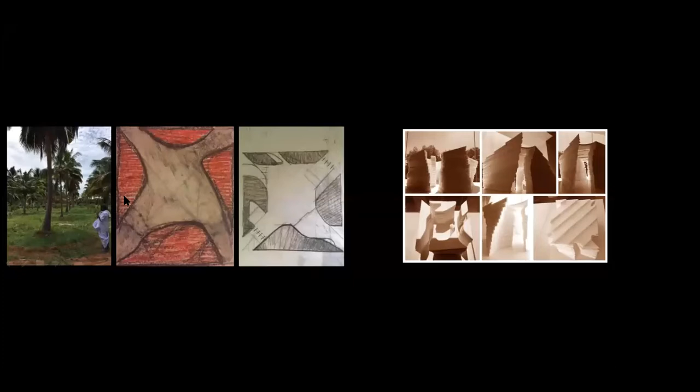So he took us to a land which was in my hometown called Tanjore. He happened to be a central minister in the UPA government for 10 years. He was the Minister of State Finance, but a very simple man coming from a background of a farmer's family, basically. And he was personally involved in farming for many years.

So he was showing us the technique of water divining. I don't know how many of you have seen this. People come with coconuts or with these wooden twigs, and then they take you to certain points where the water current happens. So the minister was explaining with the twig, it starts rolling, it generates an effect which makes the twig rotate. So he says this is probably the right place to build.

And when he was talking about that, he was a central minister, and he was out of power. His party did not come back to power, and in fact he had also lost his local posting for some political reasons. So he said, I can now spend a lot of time, and it's time for me to introspect on what is happening in my life. So you can see somebody who is really tending to look inwards. Having talked to him for so many years, you feel that there is a shift in his thought process also.

And then let's bring in this idea where he could actually be himself within a small space. He said 500 square feet, 50 square meters, small farmhouse. He said, you are free to take it forward from there. So we just took this up, and what you're seeing is the first sketch I was drawing when I was talking to him, when he spoke about these intersections, very intuitively happening. So you are standing at site and trying to think there.

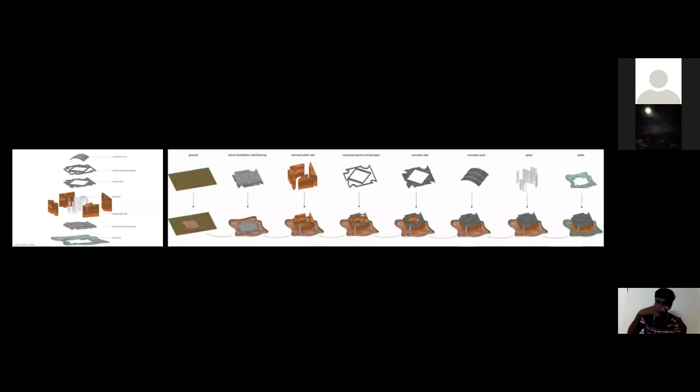You take the brick, and I'm sure you would have seen the way people stack bricks on site, about 1 meter thick or whatever. They just stack bricks and then use them for the construction process. So I was always fascinated looking at these images.

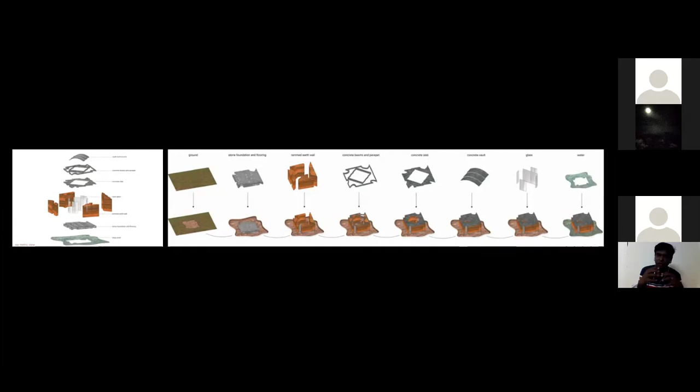So we said, if that is the case, what if we arrange bricks in a very, very organic way, where you create a form, you pour the earth, ram it, remove it, and then you remove the bricks, because they are not bound by mortar. They are just bricks by themselves. So you can remove them and then kind of recreate another form and then keep building like that. So I think that was one of the processes which was kind of exciting us.

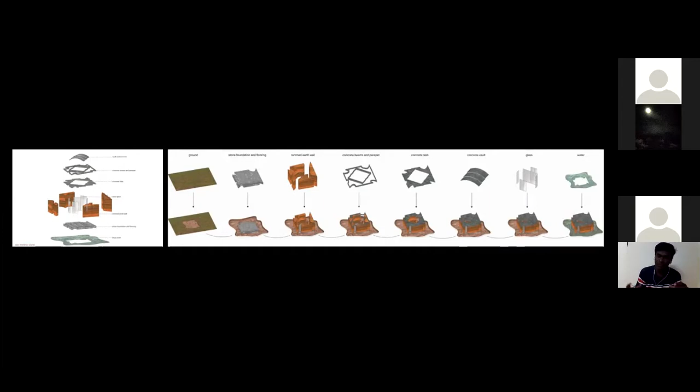So when this idea came, and then we had some old structures from which we said we will take all the stone, because Tanjore is surrounded by hundreds and hundreds of temples. So you will find locally a lot of structures having these stone footings and all that. We said, let's get them and then create like a podium. We dig earth, which is a normal process, which is the education coming from Auroville.

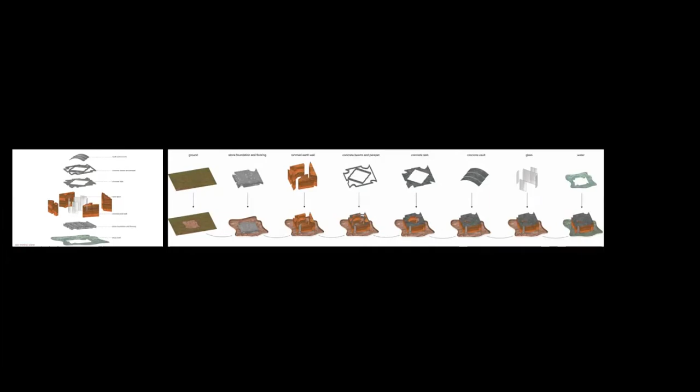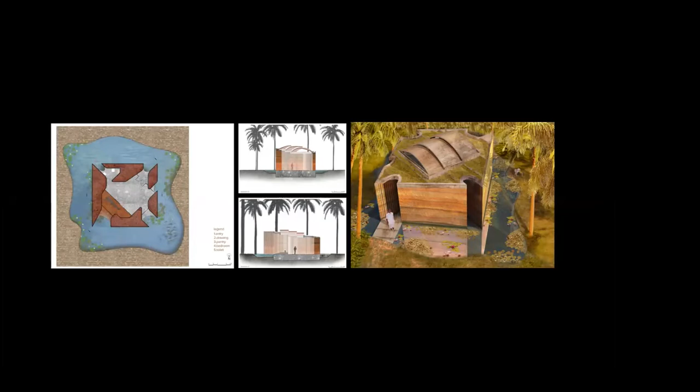See, when we build with earth, we dig a pit, we store water in that pit, and then you build using that earth. So in this case, what we did was you dig the pit, you build right above it. So you have a water body, and then you kind of plot this building within this water body. So that was the entire process. And then I told the client that we will be working only with materials which are available within the site, or within very close proximity. So that's how the entire idea developed.

So this was for an international competition, which was mentored by a very famous Japanese architect by name Kengo Kuma, for a cultural center in Senegal, West Africa. So the whole idea was very similar to the process we were doing for that house. So it's a 5,000 square feet, say 500 square meters, cultural center to be built in West Africa. And it was also calling for how sustainable you can be in that context.

So when we took up this project, we wanted to take a direction where we wanted to be influenced by the local region, and not build exactly the way locals would do. So you only take the inspiration from there. It could be the natural forms which are existing. It could be the built forms which are existing. It could be the culture which is existing. So what we identified was the baobab tree, which is very famous in the African Casamance region, as they call it.

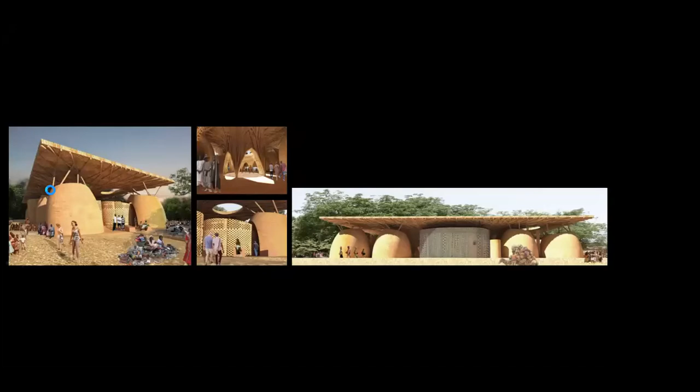So locally available material, if you say, you get bamboo, you get wooden shingles, you get earth which has a mix of shell in it, which they traditionally use for construction. So these are some of the surrounding materials which are available for our use. And then we came out with an expression which is similar to it. It's like a collage of all these 5 or 6 images you see, which then transforms into a built form.

We are also talking about wrestling, which is a very popular sport in the region. So we are creating internal courtyards where the sporting activities can happen within these internal courts. And then, very interestingly, this is also a wetland. So it's a kind of composite climate. I would say it's not purely hot and dry; though it is in Africa, it is not hot and dry.

So we really had to kind of have certain gestures. Like there were a few months when it was really hot. At that time, it was also humid. So we cannot build the way we were building in Rajasthan, where you completely seal surfaces off. So the strategy needs to be, there are certain months for the sake of thermal comfort, you might have to have certain things opening out.

So if you look at these forms, these are shapes which are completely enclosed, and you also have something which is in shade. During the humid months, the in-between places become really, really active climatically. So that's the kind of strategy you are trying to adopt. And in fact, a thick roof built out of wooden shingles and bamboo structure as a second layer completely shades the entire structure, allowing structural cooling to happen.

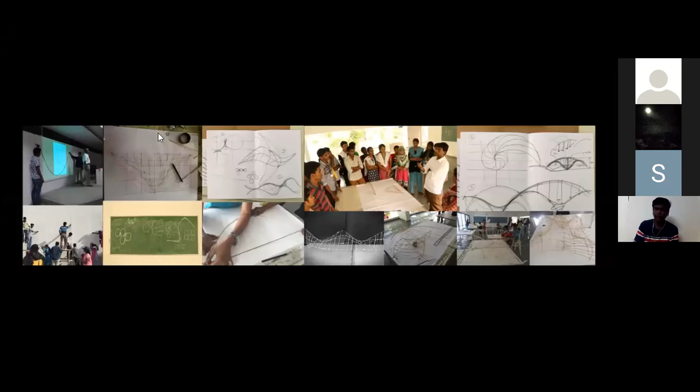So from there, we got some structural engineers, like one structural engineer from Tanjore, which is the next town, who was a very senior engineer and very knowledgeable.

So we got him to explain to the students what a catenary is, and how physically you plot a catenary. And then we even taught them the formulas to draw them. I think, if I remember well, it's y is equal to cosh of x. So if you use this formula, you will be able to plot every intersection in the x and y axis, and then it gives you a catenary.

Today, if you see the technology, in Rhino 6 you can straight away draw a catenary curve without going through all these physical processes. But the physical process is very important for you to understand how things work. Unless you feel the material, unless you feel the process with your hands, it becomes really difficult to relate. So I think it's always good to start working with simple tools in reality, and then probably jump.

So this was happening for close to 2 years. Every semester we would work with different teams. What you see here is something which was closer to what we were searching for. We started rotating the catenary curves on a certain axis, and then we were trying to vary the heights and distances, using just two sets of curves as your determinant.

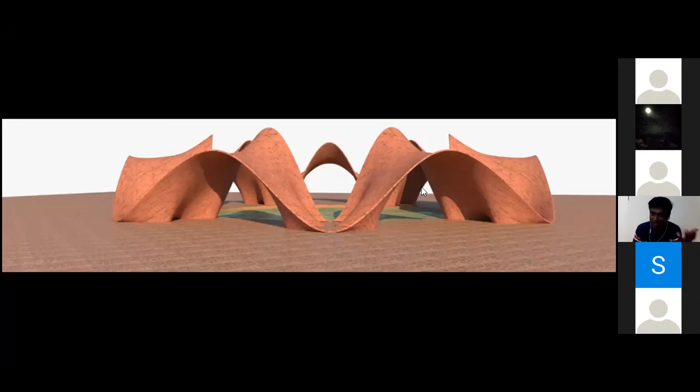And then if you see this, I think this is where finally, after the failure, we came to a point where we felt we need a few points anchoring to the ground in catenary. And then we finally ended up with this, which the structural engineer BL Manjunath said is looking more stable and there are more chances of this not failing.

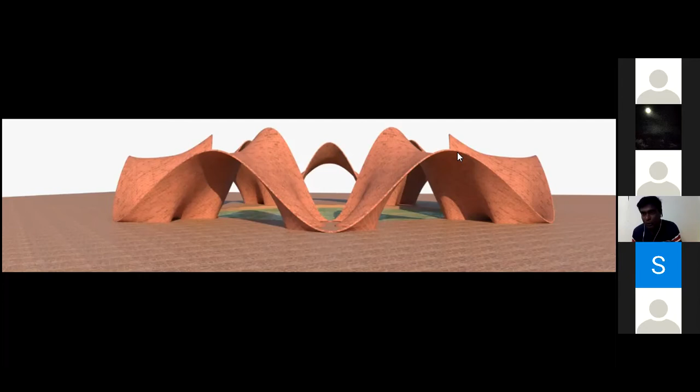So it's not that it will not fail, but what he was saying is your initial exercise was right, your analysis was right. Probably rather than building them as one single loop, you should have built the entire structure in one go, which would have created its own balance and self-supported itself. The mistake we had probably done was detaching the structure, creating a beam, and then trying to rest in it. So I think these are some of the questions which happen.

So slowly from the catenary, you start looking at a little more complex structures. Now it started. I don't know if I've written the right spelling for the Gaussian curves. I think it's GAUSSIAN. Gaussian curves, which if you look at the works of Eladio Dieste, he's somebody who got this concept of varying curves. So I realized that whatever search we have been going through, Antoni Gaudí and Eladio Dieste had work done before that. And then from there we also started looking at the triply periodic minimal surfaces.

Do not get bounced by the terminologies. Most of these exist in nature. When you say minimal surfaces, a soap film, for you to simply understand, is a minimal surface. And triply periodic, because these are all mathematical terms which are coming into the situation. You're talking about positive and negative Gaussian curvature. So, a simple example of these.

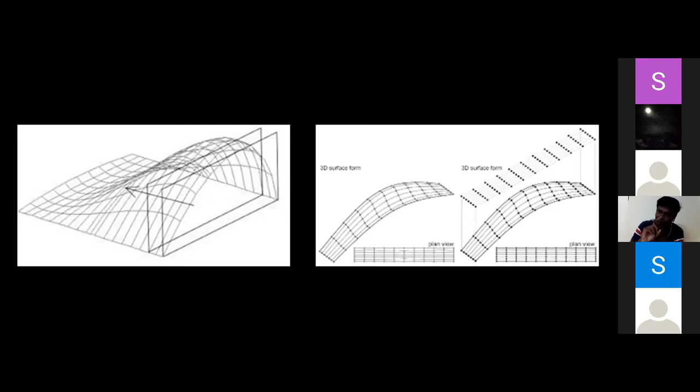And then this is the Gaussian curvature, which Eladio Dieste had established. And he had amazingly built spans up to 150 feet, which is like 45 to 50 meters, not using timbrel vaulting. He had actually used hollow tube clay tiles and built using these. So the entire process is how you nullify the forces at every point in three dimensions. There is a positive curvature, there is a negative curvature, and the resultant curvature at the points is zero. I think that's where the entire thought process is.

And from there, we were becoming more and more aware and conscious of the techniques, the geometry and the properties. So we started slowly scaling it up. I was invited in Auroville by a team to teach the technique of timbrel vaulting. We had students and people traveling from all over the world who were part of this workshop. We did not even have proper masons. We just had one guy who was helping us with most of the work; it was mostly built with students.

So here, we have been working with two catenary curves and a saddle form. We call the Pringle a saddle. In this case, we just wanted to go off center and see if we have three catenary arcs and then connect the in-between. So this is tending towards a minimal surface structure.

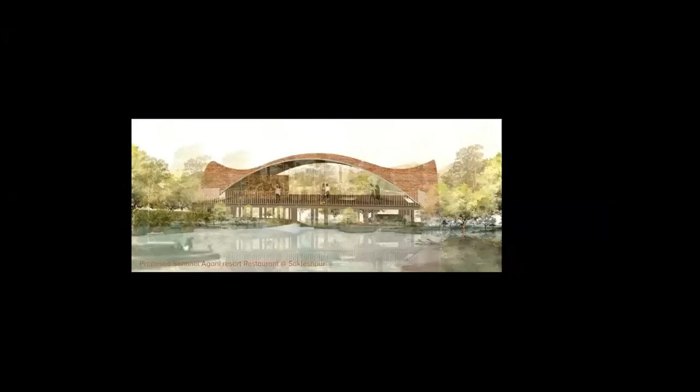And then with all these experiences, if not for COVID, we would have already completed a structure spanning close to 18 meters, which is roughly 60 feet, with no steel and concrete, and we were planning to do it mostly as a workshop. I don't know if that will happen due to the COVID situation, but hoping that something would happen. We have prepared the base and it is kept ready for the project.

So this is a small dining space in a place called Agni in Sakleshpur, where they have created a man-made lake, which is actually very natural looking. And then there was a small stream. And by the time I had gone to the site, the client himself is a civil engineer.

He happened to find a lot of GI pipes, which he got for a throwaway price. So he came and planted them between the streams. So it was already existing there. And then when I went there, what I told him was, let's retain them and then work with the structure, with that as the context.

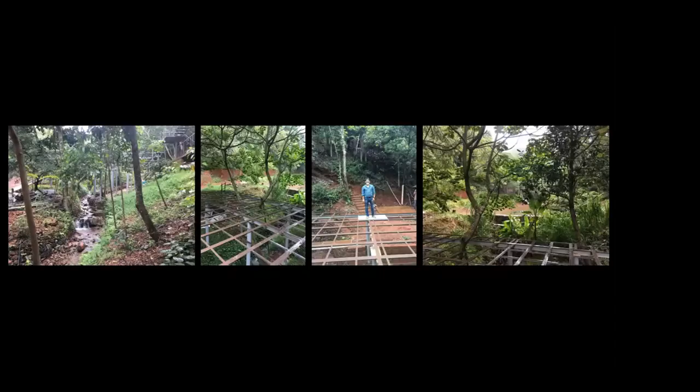So if you see, I think these are the columns. I think you'll have to observe them very carefully. So these are the columns he had already done. So we just used that, added a very simple basic steel framework. We didn't even have too much structural consulting.

The client himself is a contractor and a civil engineer, the client who built those Mysore farmhouses. So we know each other well, and we trust our instincts. So we just had a very minimal steel framework over which we are using the stone slabs.

You get these Shahabad stones, which are like 1.5 inch thick, like 35 to 40 thickness, directly placed on the steel structure and pasted using Araldite. So it just forms your floor. So initially he was thinking that we should be having a deck slab and all that.

And with our experience in the last 5 years of working more intensively in this, we realized that there is no point in having a concrete slab and then putting another flooring. The flooring would end up costing you like 85 to 100 rupees. And in this case, you're already having the floor as well as the slab in it.

So I think that's where the entire process is, and we should be up with the vault in the next 2 months. Again, it's a heavy rainfall area, so we have been waiting for the rains to get over. So the base work for the vault will start in a week's time.

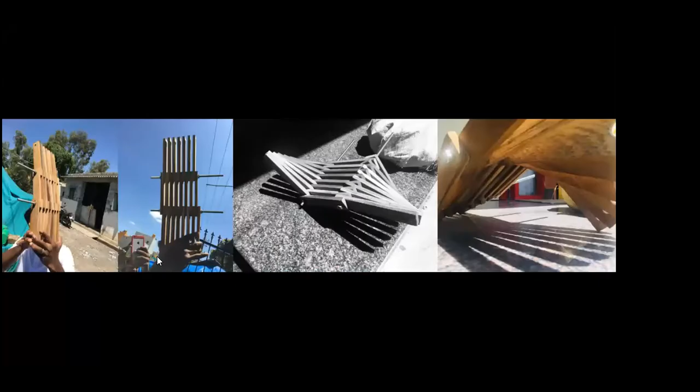He was asking me if we could actually do something interesting, or just find a way to repurpose the wood, and he just loaded me with 4 or 5 sacks of teak wood. And then when this opportunity came in Designeroo, we just got these simple GI frames going through. We developed a system with it.

We were actually planning to build a vault out of it, but it was an overnight installation, so we did not have the resources, both in terms of people, technicians, and money. So we ended up doing a partition wall, and what we realized was the compressive and tensile forces were handled very beautifully by the wood and GI combination. So these are simpler forms.

In one of the exhibitions in architect Dominic's office art studio, we made this as an installation again, where you could see how the materials, when they combine together, start behaving almost like concrete, or like a drape, in fact. And it has a very beautiful stiffness, which offers you a lot of possibility to make structures out of it.

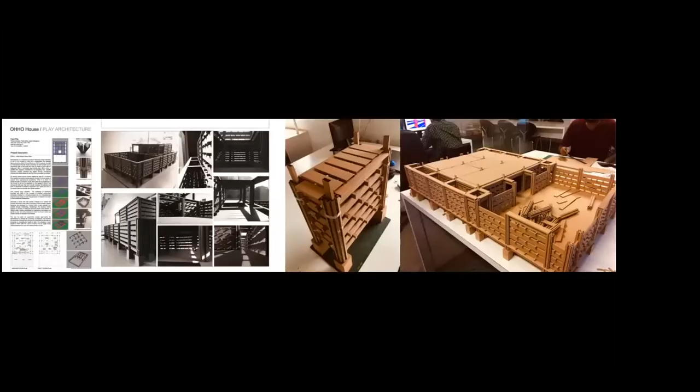So this is the initial part of the research, where I was just questioning. I happened to see these very beautiful stone slabs, you call them the Chabdi slabs. It is a very underused material to me, because people use this as a drain cover, and when somebody sees it's a drain cover, it's a cheap slab. But it was not the case. If you look at the compressive strength stone has, it's probably 3 times better than concrete.

So the idea was, what will happen if we combine 2 or 3 slabs and interlock them and work a combination. And then I happened to sit with my civil contractor, who said, maybe instead of combining, it's easier if you get a thick stone like the way they build temples, and then create these slots and insert them. And then we went back and sat with the structure.

So these are some of the traditional techniques which people follow. If you look at the traditional techniques where they have these beautiful dowelled details, you will not even know how the column has been inserted. And we wanted to just put blocks of stone as foundation, which I almost managed to execute here. Bad timing, I would say.

The quarry which is near my site was closed because somebody dynamited the site unofficially, and it has been sealed by the government for a few months. So we were not able to get stones locally from there. So we had to do size stone masonry as an alternative. And we are using lime mortar in the process as a mix. So we are just in the process.

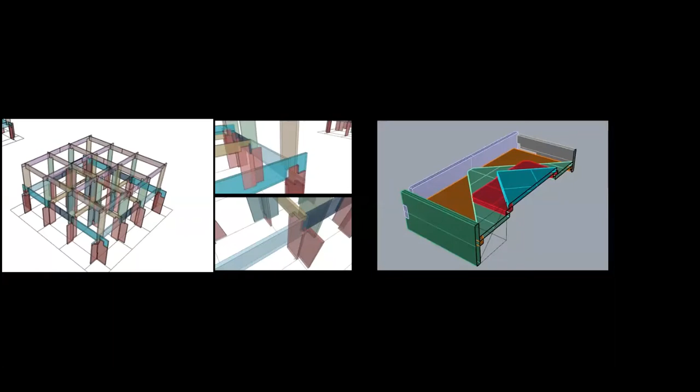This is coming from the structural engineer, Mr. B.L. Manjunath, who said, I will take the intent from you of using stone, of interlocking stone, but I would restructure it in a way that it requires the least material for the entire process, and then assemble them in the structurally correct manner. So that's where we reached, and then realized that we are pushing too much with the stone.

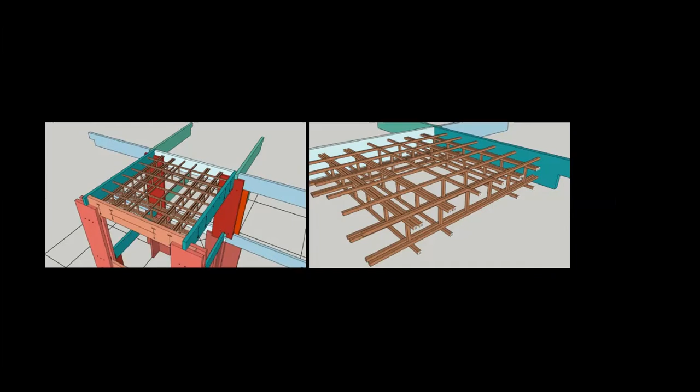We even wanted to do the entire roof in stone, but later he advised that because of certain tensile forces coming in, it wouldn't work. Stone is very good in compression. You can keep adding stone after stone; that's how they build temples. But when you use a thin stone and exert a load on top, there is a tensile force which will tend to cut the stone in the middle. So he said in combination with wood, it is a much more sensible solution. So we have moved there.

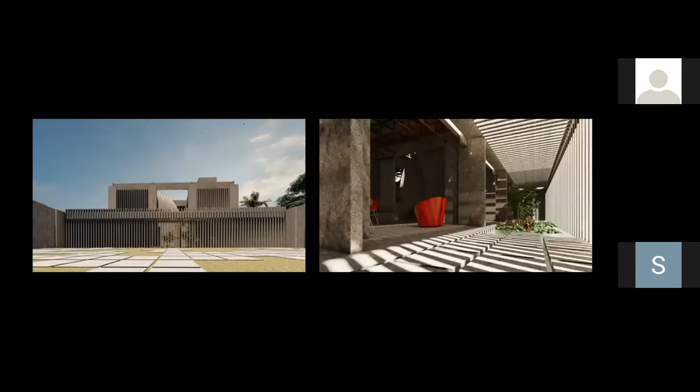And this is one of the visuals. We are still working with it, where these are all completely out of interlocked stone. And then we are at site. I've moved my entire home and office, used COVID as an excuse to move to the site, live close by, like a 5 minutes walk from the site, and go every day.

And we have started with these first mock-ups where we are understanding how to actually build with stone. I've never worked with stone in the last 20 years. So the beauty of how you can get these brilliant crisp joints in stone, how you can interlock them, push them through, and even create details for glass to be inserted. It's a very sleek groove, like the way you put fixed glass. So you can just bring a piece of glass, insert it and seal the entire building up.

These are some of the offbeat researches where we started understanding how stable it becomes when you just interlock them. And then I've been traveling to as many quarries as possible, and we finally found a quarry which was able to give us like a 15 feet span stone and like 2.5, 3 feet, which is crazy. But I think there are very few quarries which will be able to give you that. So in the process, you also get to travel, you get to see, you understand the process, how they even cut stone and work with it.

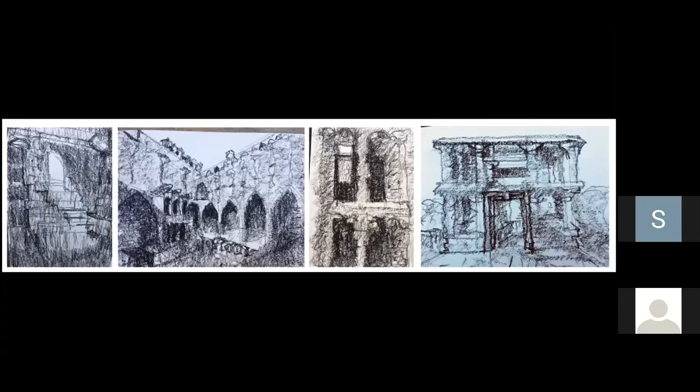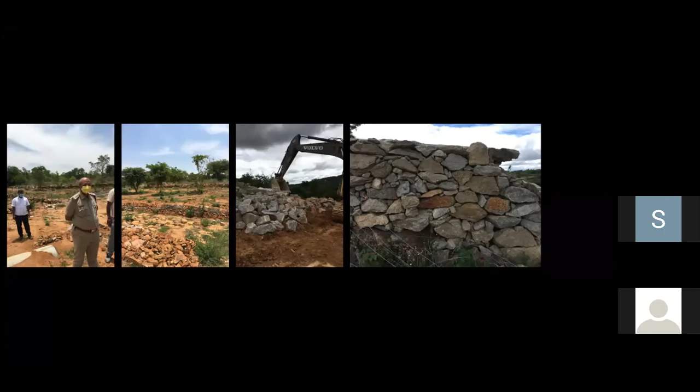And some sketches where I think Deepak was also part of this trip to Hampi with students from Trichy. So stone became an obsession. It's kind of constantly hitting you. And then this is for another project for a small farmhouse, which is to be built like 3 or 4 very small, what do you call it? It's more like a hotel suite unit, but on a large site, like a 10,000, 11,000 square foot site. And the site is again like 1 or 2 kilometers from the stone quarries, where they have a lot of these waste stones after they have removed the stone for making bigger slabs and all that.

And if you look at traditionally people in that region, this is actually the site and the surrounding. You would see people building compound walls using this, no mortar in it. It's purely through gravity. And then if you look at this, here was our client. He was the assistant commissioner of police. So maybe his stature made me look at a structure which is kind of bulkier. And he kept on saying that he loves boulders and rocks.

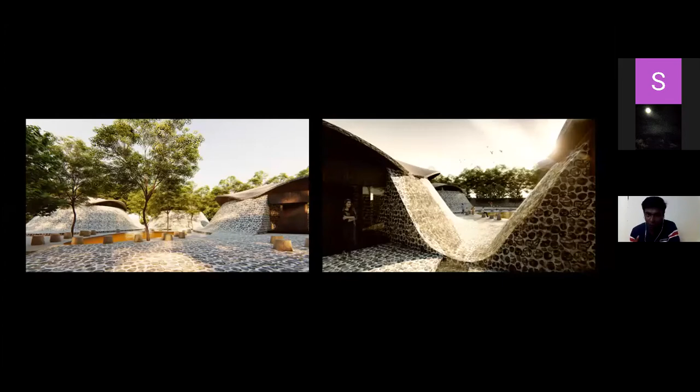And when we spoke to the people nearby, they said, we can get you boulders. So I was imagining the boulders to be like 10, 11 feet tall and big boulders. So the initial sketches were just dreaming to build only with boulders. And then 2 weeks from there, when I was asking what is the size of your boulder, they said 1 feet, 1.5 feet, big stones. So it kind of took the idea away. But what we achieved there finally out of these small ones was something like using them in the right geometry. So it's a pyramidal structure which is sloping at the base.

So we even decided that we'll not be using mortar. You can use the local soil as mortar, and use lime to just seal the joints. So you don't even need cement mortar. But then you do walls which are like 6 feet, 1.8 meters at the bottom, and then going up to 450 or 600 at the top. And then the plan is curvilinear, so the entire form is stable. However the lateral movements happen, the structure becomes stable without any mortar.

So these are some of the things where you are evolving as an architect, trying to look at the local context, the way people built traditionally, and then combining it with the geometrical knowledge and the structural knowledge you are picking up over a period of time. The expression keeps changing in different projects.

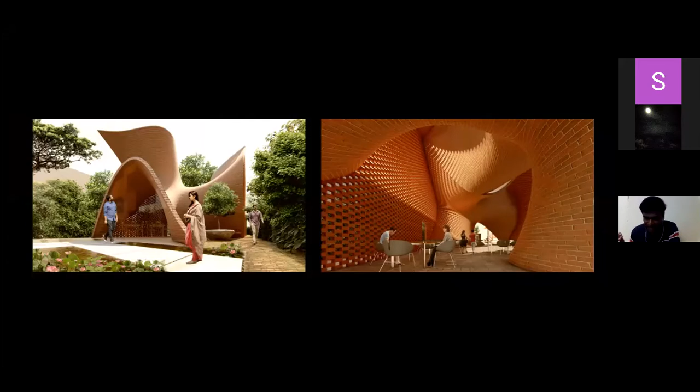And the last project to talk about, again going back to minimal surfaces, this is called a gyroid, which is a triply periodic minimal surface, which I was talking about, which exists in nature in a lot of systems. And we are proposing a small dining space. COVID has killed most of the beautiful small projects which were supposed to happen, but I'm sure we will be able to take off very soon. Thank you, and I think the search will continue.

Just give me 1 minute break, please. Okay, Senthil. Yeah, go ahead. Thanks so much. So while Senthil is taking a break, can you please be ready with your questions? Deepak will moderate. Yes, I'm back. Sorry, yeah.

So towards the end, it seemed like you rushed. Is there a problem? It's raining very heavily here. I don't know what will happen with the power or with the data. It's super pouring. And I don't know if time permits, but we can probably ask students for questions so that we can revisit the slides. If they are curious about some areas, we can always go back to the slides.

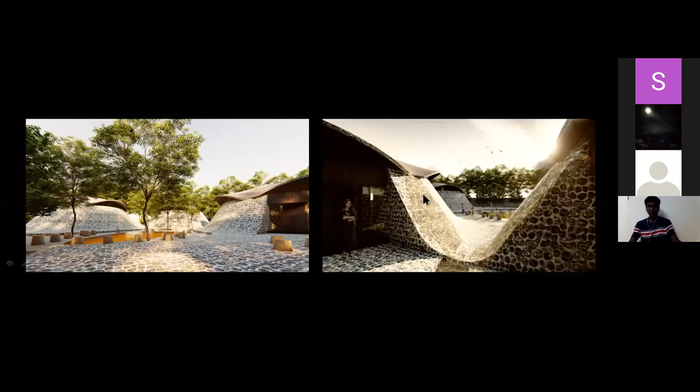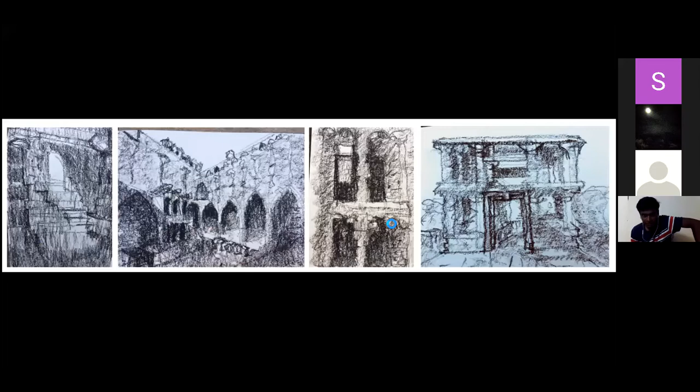Yes. So just to begin the conversation, the slides for the Tanjore house, right? The slides were really small, so we were not able to see how you had worked with the formwork. If you could zoom in and explain the idea of the formwork, how. Okay.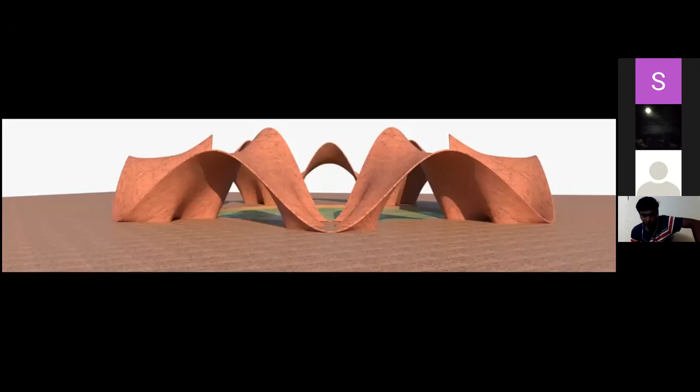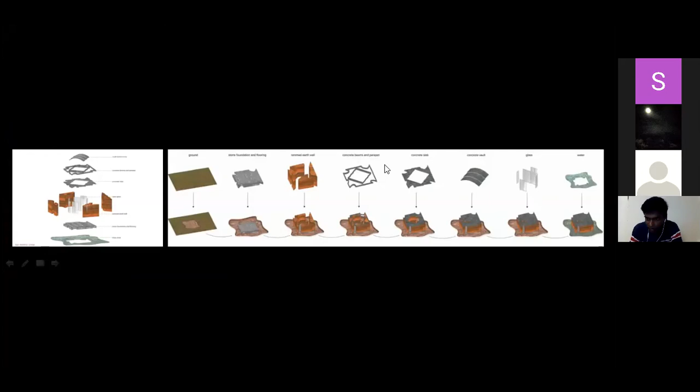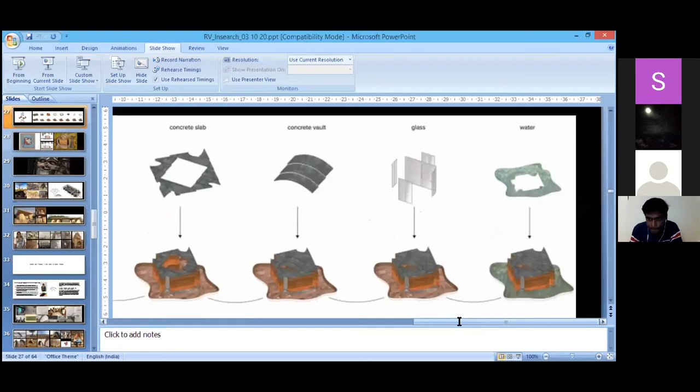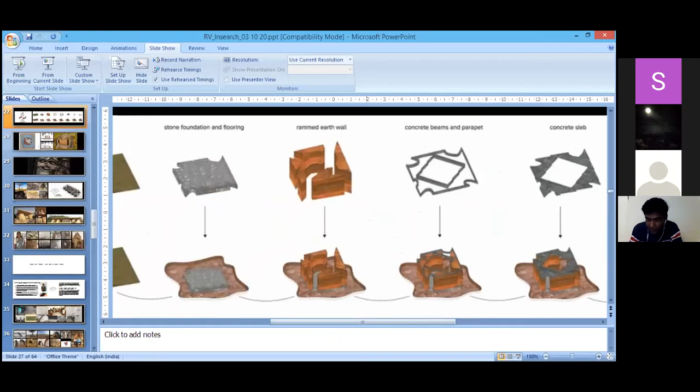I don't know if I can. Let's see. Let's try. Can you see it now? I think you might lose the resolution after a certain point. Yes. Yeah. Is this visible? Is that visible to everyone? I think, yeah, the students can unmute themselves now and respond. Yeah, yes. Yeah.

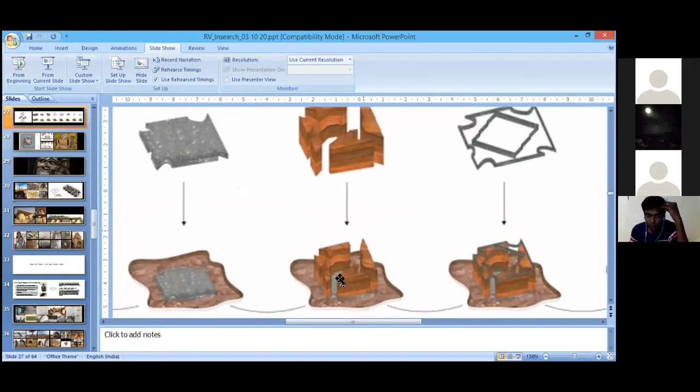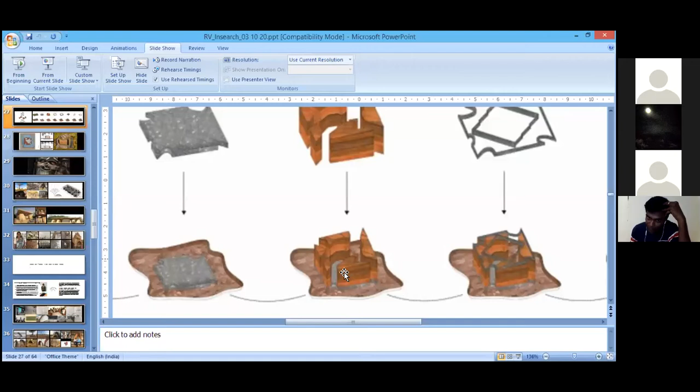So basically, if you have these shapes, you arrange bricks basically like the way they arrange it in a brick kiln or whatever. And then you arrange them in these different shapes. So you can actually develop for one, and then you remove the brick, and then you kind of redo this, and then you take this out, and then you build this. So you can actually keep building them in different stages and in different shapes. So that's the whole idea.

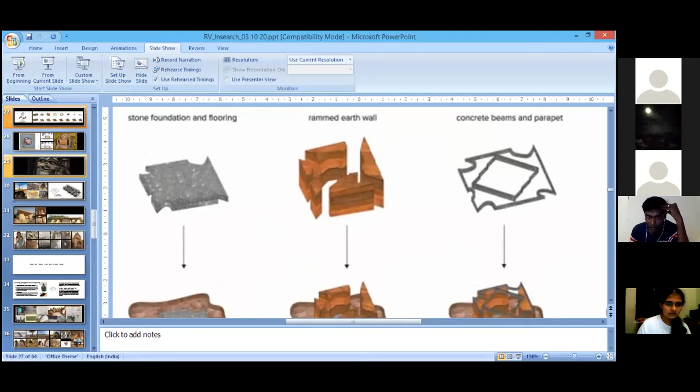So what was the roofing material used for this? See, we were looking at using the same brick to kind of create the, if you see this one, we were trying to build with the bricks itself as a vaulting technique. So you do the formwork, you take the brick, you build the roof out of it, you also create the landscape out of it. So the formwork then again goes back into different forms, like a roof form and then the landscape.

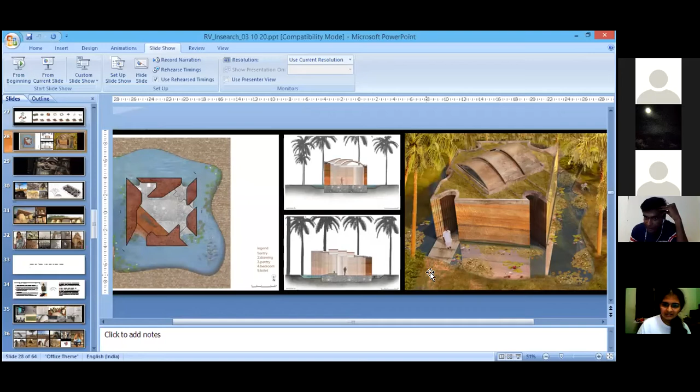Oh, so the gray part is brick? Sorry? The what wall? This one, what you see there? Yeah. Yes. That's like a brick vaulting, what we have been doing in the future projects. Okay. Yeah.

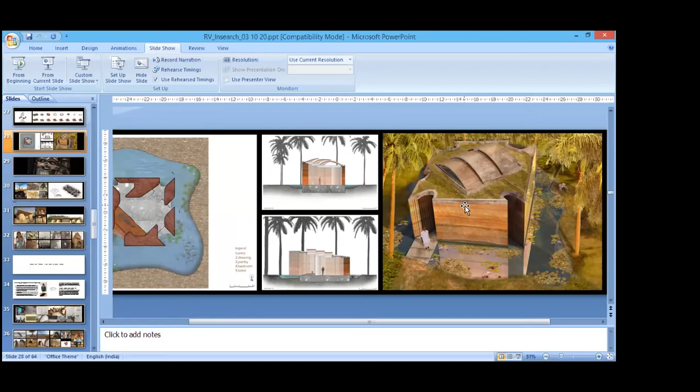So, sir, as you said, making organic forms with rammed earth, the formwork and all gets expensive. What are other methods of making it economical? Like, bricks, nice way, but is there any other? So we will still have to keep looking. Every time you are thrown with a different challenge, we still haven't found the next alternative to it. See, you can also use bamboo formwork. You can use bamboo, and you can leave the surface of bamboo. You can express the nature of formwork when you remove the bamboo.

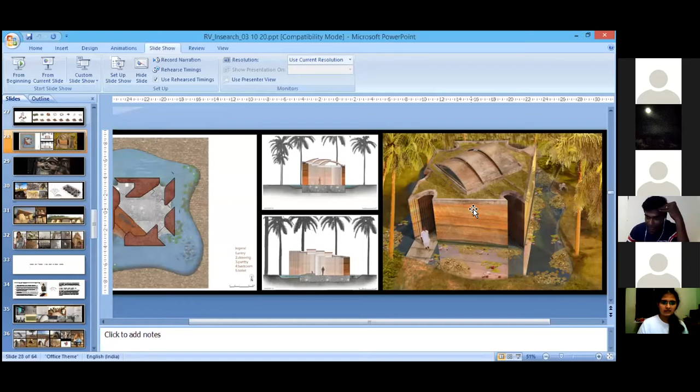I'm sure you would have seen an architect by name VTN Architects from, if not mistaken, Vietnam, who have done exposed concrete using bamboo formwork. So that's probably a good alternative if you really want to do something out of rammed earth. So you will have to make a decision. Like in this case, it was the flexibility the formwork was giving which eventually gave us the form making. You can also fix the form and then look for an appropriate formwork. Traditionally in Auroville, we would use steel formwork or ply formwork.

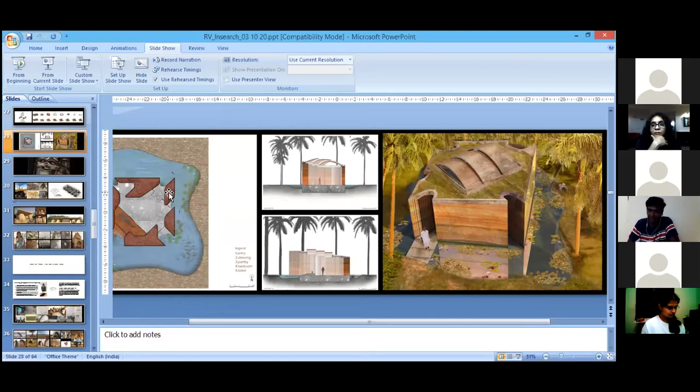Senthil, since we are on the topic of rammed earth, a very quick question. Someone asked, what is the longevity of this kind of construction? Because that's one thing we've been asking our students to think about as well, when you think of sustainability and durability, not just in terms of material, but economy and all that. See, to be frank, in today's context, we don't have labor, which is throwing us the challenge of doing structures like this, unless we as architects train ourselves to find local people and build it. I think that's what most of the cases I've been doing.

So you are trying to pick up guys who are living around the site, and then you go there, you train them, and then you get them to build the vault or the rammed earth. So this is one of the biggest challenges, and if you want skilled labor, it is becoming a very expensive way of constructing. So that is one. Second thing is longevity. It purely depends on what strategy you are using.

See, in this case, I'm using walls which are 1.5 meters, 2 meters thick. So even if there is rain washing it over a period of years, you don't see a problem with the structure. What traditionally we used to do is create an overhang or do a coping on top. So the edges need to be protected for the rammed earth to be sustained. And if you go to Auroville, you will see structures which are 30, 35 years old and absolutely not facing any issues. If it is well executed, I do not see any major issues of erosion happening for it to erode.

So detailing really matters. Understanding the material, the nature of the material, and certain precautions, like providing an overhang which will cut direct sunlight and the rainfall which is hitting the surface directly. Then you are exposing the surface less to the elements, thereby the life can be increased. So these are some of the small understandings which we pick up over a period of time.

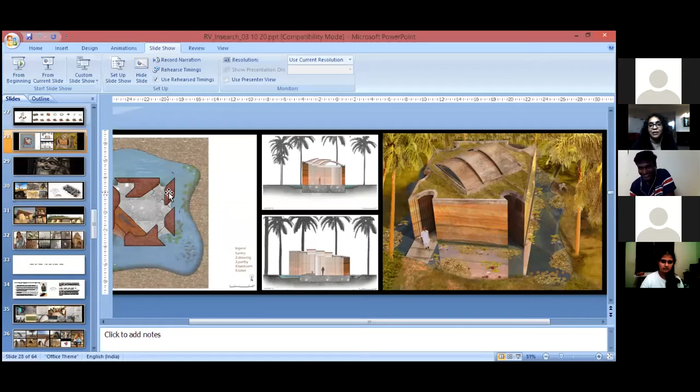Okay, great. Thank you. Yeah, pleasure. Hello, sir. My name is Anjali.

Hi. Yes. I had some questions about how you've used catenary curves to make all of those interesting structures. The site where I'm working this semester has a lot of rock around the area, so I was thinking of using catenary curves and stone to make a structure there. I started working on some iterations, intersecting two catenary curves. Whereas in most of the examples you showed, there is no intersection, or at least I couldn't see one, and it looked more like a series of flowing curves. So I wanted to know if it's possible.

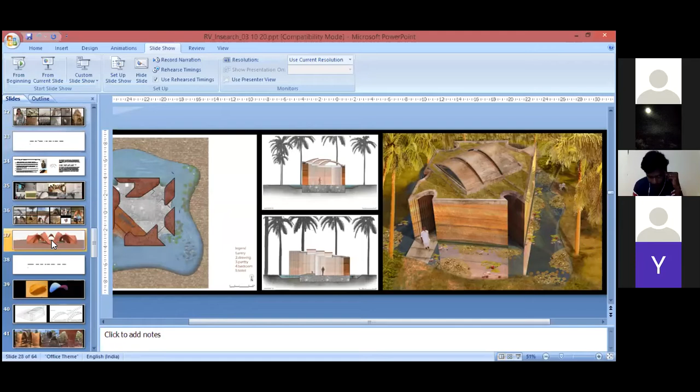You can do an intersecting one. Just study Antoni Gaudí, he has already done that. If you look at Gaudí's structures, what you need to do is hang a chain. You also hang chains where you are intersecting. The moment you do that, the principal curve will go through a certain deformation. That's the most important thing, because when you invert them, they are going to be structures in compression.

So when you have this pushing this, this point is where the forces are being transferred. So instead of the structure collapsing, the chain would hang in a different geometry altogether. It would take the forces coming on it, and the principal catenary will go through some kind of deformation.

So what you can do for yourself to study is get a lot of chains. Get these small chains, or if you have a pet at home, dog chains are the best to work with. Simple methods. You hang them on a wall, you just nail them, and keep hanging different chains. You draw your sections, hang them and see. From the first curve, the moment you suspend the second curve, you will see the catenary beginning to deform. So you need to work with the deformation.

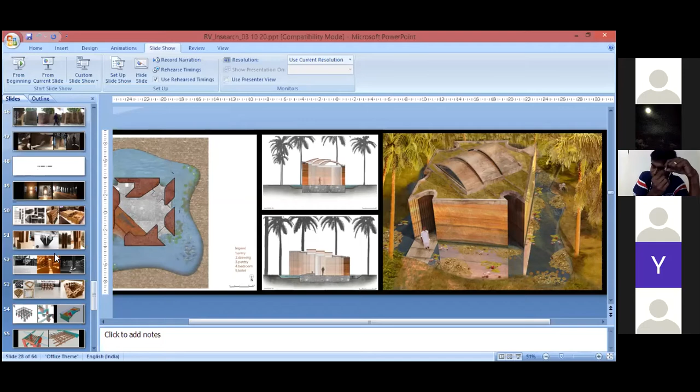In fact, if you look at how we were trained in Auroville, at the works of architect Satprem, one of the big names in domes and vaults in Auroville, they would also hang loads on the catenary curve. Because when you hang a chain and invert it, you are not just going to have the self weight of the structure. You are going to have people on the roof sometimes. So you hang the chain, determine certain loads, and the geometry of the curve is determined after the loads are added. You can also hang loads at different positions.

Just go home. I'm sure you are still at home, so you can hang different chains at different points, different heights, springing points, and then do a beautiful study of the curvature.

Yeah. Okay. Sir, I had one more question. Yes. So is it possible to put a catenary curve on top of another catenary curve? This will be probably our next experiment. It is possible, highly possible. Okay. So we still haven't done it, but we are in the process of hitting that question next.

Yes. See, again the same answer, that your bottom catenary curve will go through a certain form transformation. So there is some deformation to absorb the forces which are coming on it. It is possible. If I'm not mistaken, Sagrada Familia by Antonio Gaudi has already done that. Okay, yes. I'll check that. Yeah, please.

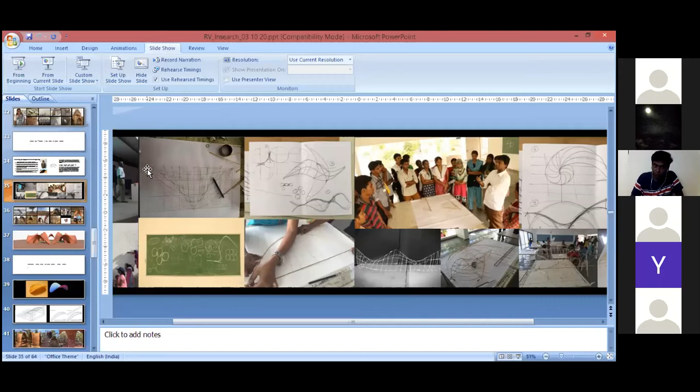Yes, it is done. It is three-dimensionally calculated. Every curve is plotted in reality. So I don't know if we can see this. See, like even when we are making the model, if you draw grids, you have a grid of every 500 mm spacing, and then we plot it to true scale. So what we do is we bend thin steel reinforcements like an 8 mm rod or whatever to understand this profile, bent using minimum steel reinforcement.

You can also use bamboo if you want. For us, steel, you get bar benders very easily. And you can also use the same steel to repeat the casting. So it becomes very less expensive, really economical when you want to do a series of forms which are similar in curvature. Yeah, no, I just wanted to ask if bamboo had the strength to be a formwork. Absolutely.

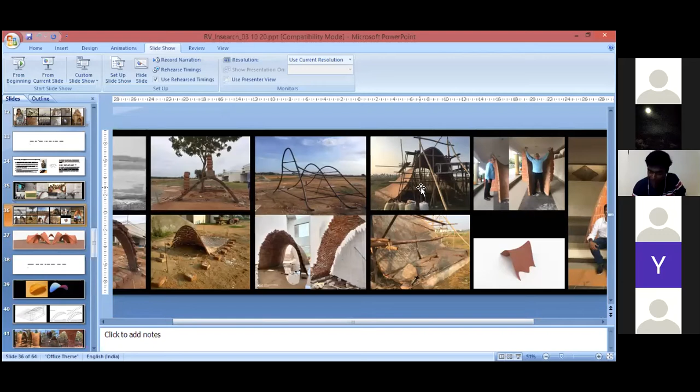See, what we would also do is these intermediate supports, right? It's not just a piece of bamboo which is bent and kept like that. Like the way they would support any slab, you can have these casuarinas or bamboo, anything to support it vertically. What you need to do is arrive at these templates. The curvature has to be arrived. So you make these shapes and then you support them tentatively.

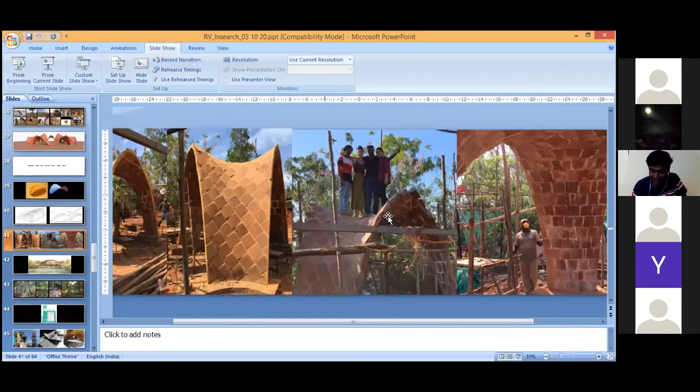See, in fact, recent understanding for me: to make this curve and support it is becoming very expensive. So we have realized that nature and geometry will never cheat. This had such less formwork in it. Between this and the first exercise, we had so much support, but with our understanding, slowly we were able to reduce the amount of formwork coming into the structure.

So we basically had like 3 or 4 curves, and then we were able to go ahead with just a couple of bamboo verticals to support the entire structure. So if you think along with the geometry, it can be really economical, and a lot of cost saving can happen there.

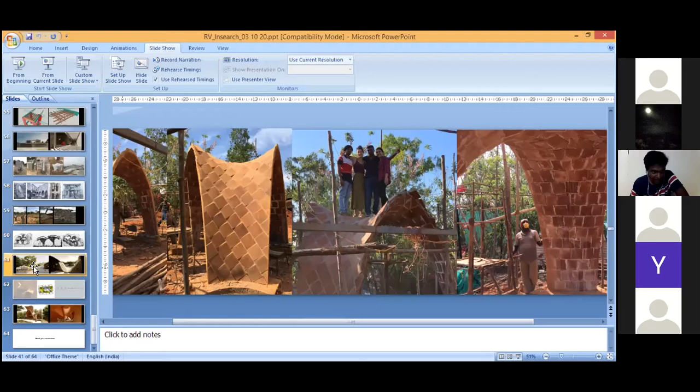Senthil, a student has typed a question. She asks, is timbrel vaulting possible with Cuddapah stone? We should be able to do. See, this project is going there. We still haven't hit the site. This roof, what you're seeing, we are potentially looking at something like a 10 to 12 mm, what you would use for your kitchen countertop. The granite, the 8 mm or the 10 mm countertops, the thinnest possible.

We are possibly trying to work with that in this project. So it should be possible. In fact, architect Peter Rich has been telling me, Senthil, you take marble, go to a marble shop, get some waste marble, build it there. He said, looking at your passion, you should just keep trying this out with different material.

So I'm sure it should work. Technically, it should be able to do it. The only thing is stone is heavier, the density is really high, so the self weight is going to increase. So the solution we are looking at is to use the thinnest possible tile. If you're using something like an 8 to 10 mm tile in 3 or 4 layers, we should still be able to do that. Yes, it is possible. So you see the stone edges. I think that's what we are dreaming about.

So if we were trying to make these catenary structures with stone itself, not tiles, is it possible to do it with stone blocks? Stone blocks you can do. I think what you should also consider is, when you have density, you don't need a catenary curve, right? You can still use it, I'm not saying otherwise. See, the beauty of catenary lies in the minimum material requirement. Otherwise you're using more material, making the structure less economical. You can still do a catenary, not saying that it should not happen.

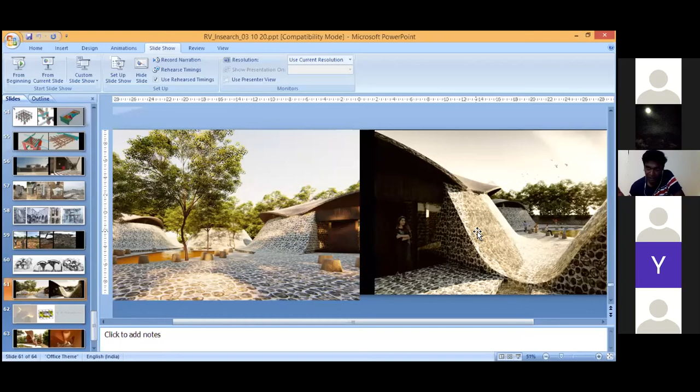Please go and refer to a project by Philippe Block, done about 2 years back, Armadillo. Please note down the project called Armadillo. It was also in the Venice Biennale last year, or the year before that. It is out of natural stone, carved in 3 dimensions. It has nothing to do with sustainability. He also accepts that. He said it was just for the fun of research and for the sake of showing people the beauty,

where they have used stone, 3-dimensionally carved the stone to the precise geometry, and they have assembled it. It has no mortar or any glue at all. So it's the perfection of the form and the joints. They are just using interlocking of the stone to create a complex vaulted structure. So it's one of the amazing works I think you should see.

But if you go back to the sustainability idea, it is too intensive a process, where you lose the intent of sustainability somehow. He also says that. So for the sake of the research, they were quite excited to do something out of stone and see a form which is stable without any mortar, without any glue. Purely gravity holds the structure.

And he has developed a software called RhinoVAULT, which helps you analyze vault structures in a very easy way. Sameep Padora in Mumbai built the library using timbrel vaulting, and in fact he used RhinoVAULT to do the analysis. He was talking about that in one of the talks. In our case, I'm not somebody who would want to jump into the software directly. To me, it's more hands-on. We still use a lot of software, but I think the fun is in working intuitively and hands-on. Yeah.

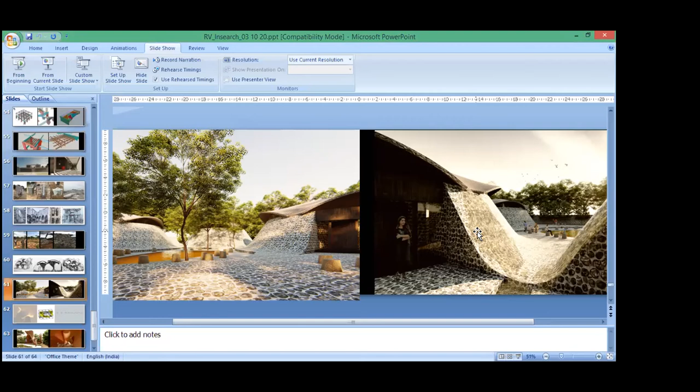there are a lot of limitations for students, especially in this COVID time. There is no one-on-one interaction with the students. We are not able to be there inside the studio with them. So in terms of exploration, what do you think the students can actually do when they're looking at a material, looking at a structural system? How can they explore these ideas sitting at home? What is your view?

Let them understand. I'm sure they know their context now, and they know what is the material which is in their hand to work with. Hello? Yes. Sorry, okay, fine.

So they now know the material which they are going to work with. So let them go and do a study for a week or whatever. Probably, I think for them it's good to do a lot of case studies on a specific method, so a material and methods of construction. Maybe they can shortlist two or three different kinds of approaches, if you look at what we have been doing.

You picked up stone. So in one project you are using the density of the stone to do the structure, and on the other hand, you are working with a structure which uses the surface. So just by means of altering the basic technique, they can do some study. So let them make mistakes also. I don't think there should be any problem in making mistakes.

So let them identify the methods, or let them do some reading and then come back. Probably they'll be able to share it with you, and you'll be able to take them through the process. I think that's probably the best way to do it. Somebody said she's got rocks near her site. If that is the case, what are all the methods in which one can build with rocks is one study they can actually do.

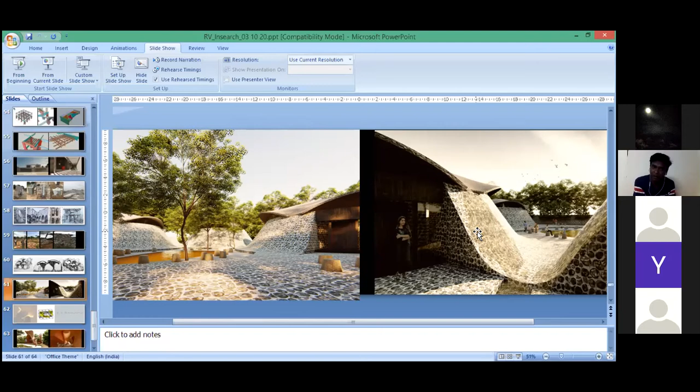Even if they don't innovate a process at this stage, because it's too early for them to innovate a certain process or come out with very authentic construction solutions, they can probably choose the road not taken out of it, and then see how that can complement.

So I think that's where the key is. So let them first come back to all of you with what are all the different things one can do with stone, or one can do with, say, XYZ material, whatever they are picking up. Like somebody can pick up bamboo, somebody can, if the site allows them to have a lot of wood or whatever, look at wooden structures. And it's not about different aesthetics, but probably different techniques in this case, like different methods in which people have constructed traditionally, and then modern researchers.

Like remember we were looking at the filler block, and we were saying that triggered interest because it had a complex curvature to it. So you then start asking a question on how they managed to do this. So I think that's probably the best way to do it. So let them have a list. I'm sure if you take stone, they'll find 100 techniques. But if they want to shortlist something, they can pick something which is really unique in terms of the technique, try to understand that method in detail, and come back and express that through their design.

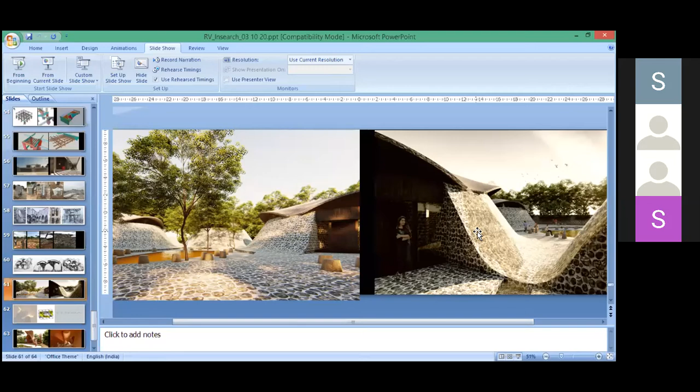So when we are trying out study models and exploring materials, we start working with tinier blocks. But when we try to build it on site, scalability plays an important role. So how do we go about using small blocks when we try to build at real scale? I think you cannot literally translate a paper model into a real scale model. A paper model to some extent will give you gestures or ideas that the structure could be stable.

So work with a material which has the closest kind of property. This was advised by the structural engineer, Mr. B.L. Manjunath. Once I was making a model, and he said if you are doing a model based on compression, use a material which is good in compression. Or if you have a form which is more towards tensile force, work with fabric, work with cloth, work with material whose behavior is closer to what you are imagining in reality. I think that's probably the best way.

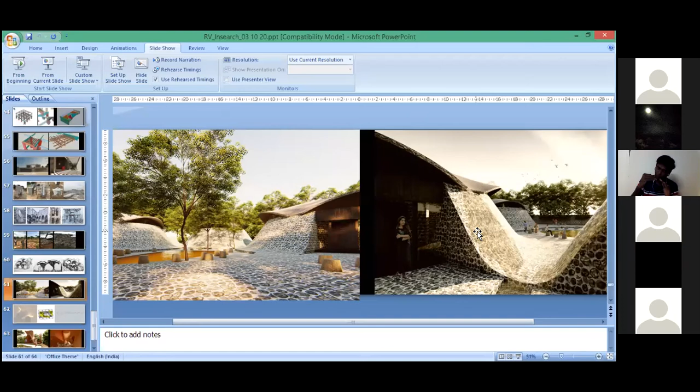What we have learned over these years is that when the structure is in pure catenary, be it a negative Gaussian curvature, which I was talking about in one of the slides, it requires very minimum formwork, and even the thicknesses can be brought drastically down. So the form is very, very important. Maybe had they adjusted the shape, the way it touches the ground... I think he had this architectural intent where they wanted the roof to seamlessly meet the ground, so that people can walk on the top.

That is probably why they had taken the portions which induce tensile forces, say 1 meter or 1.5 meters from the ground, and from where it became compressive, they have done this with the tile. It is a sensible way of doing it, because architecture cannot be determined purely by technique; as an architect you will have so many other intents to address. So we should not become blind by our technique. We should know where to play and what is sensible. From that sense it was still sensible.

Okay. One more question. If I'm designing a vault similar to that, and it's part of a water body with still water, not running water, will that affect the stability of the vault? I don't think you will really have to worry, because it's going to rain. Mumbai is going to rain, so you are going to have water anyway. Maybe at the surface level it might run over the mortar. Personally, with the kind of gradient you see in those structures, I really don't see water hurting it.

Worst case, in real time, you can always do like Antonio Gaudi or B.V. Doshi, the China mosaic, and then inside it's brick. But Peter Rich's advice to me was that in Africa the rainfall is scanty, whereas we are building in a context like Bangalore or Mumbai with heavy rainfall. So you might have to protect the top layers. And depending on the span, the scale, and the heat you want to control, you might need a thermal barrier or a weather barrier.

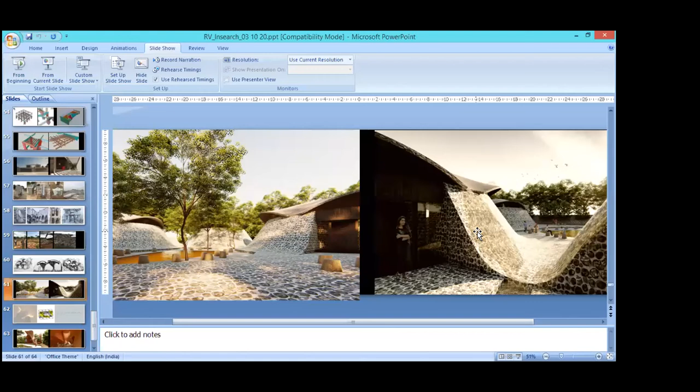Okay, great. So, are you talking about the thermal performance of the timbrel vaulting? Yes, sir. Thermal, and as well, does the form affect the thermal or the rainfall? Not really. In fact, this is an interesting perspective, because if you look at the force flow of these structures, the pattern in which the water would flow is the direction in which the forces will also flow. So water and these forms have a very close association.

One of my friends, Utsav, who came back from IAAC, was helping me with the initial analysis of these structures. He was making a 3D analysis. We used to build this with Rhino, then take it to a plugin called Kangaroo, the physics engine, where the mesh gets optimized. You first have the surface optimized, and then we apply the load. The moment you apply the load, the structure again gets optimized.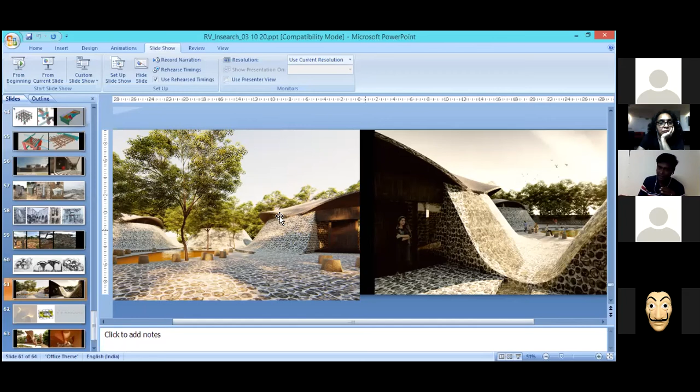If you look at this slide, you see these slits with glass openings, like glass louvers, so the hot air still moves out of the space. You have a draft of cooler air coming from a lower level, and the form itself allows hot air to escape through the roof. So designing holistically will allow you to solve other issues also.

Okay, thank you, sir. Yes. Hi, sir. I'm Tushara.

Hi. Sir, in your PPT you showed so many different materials that you used. With respect to my concept in AD, how can these structural forms and joinery be used with unconventional materials like plastic? Currently it's been an issue. When I was looking through case studies, there are very few projects that have used plastic as a material. So, your thoughts on using plastic as a material?

Just to add to Tushara's question, there's one in the chat box. What are you using and what is it that you're doing? Yes.

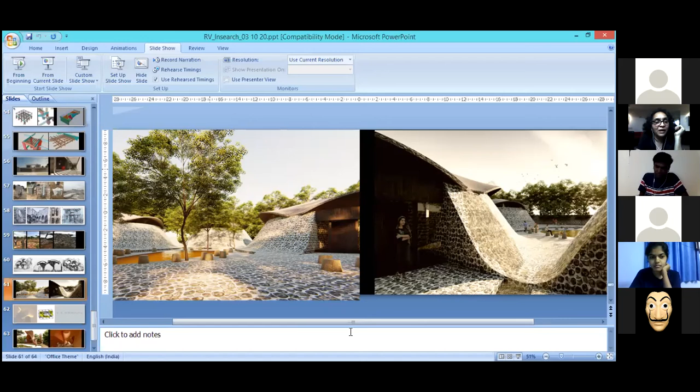How come it's popping up for me? Can somebody read that out, please? Responding. Okay. It says, hi. Can somebody read out what is in the chat box?

Yeah, Senthil. So Pavitra from the thesis semester writes. Can you hear me? She says, I am exploring how upcycled plastic can be used as a building material. It's similar to what Tushara asked, that's why I bring it up. How do I approach this material? Because there are not many projects I can study. So which is pretty much what Tushara also was asking.

Okay. I'm still not sure if I'm the right person to answer you because I have not touched plastics as a material. But as far as I know, how would you want to use the material? Can somebody have a conversation with this question? So when they say upcycled plastic, is this something which has the grade which can be recycled? I'm just asking a question to understand your thought process more.

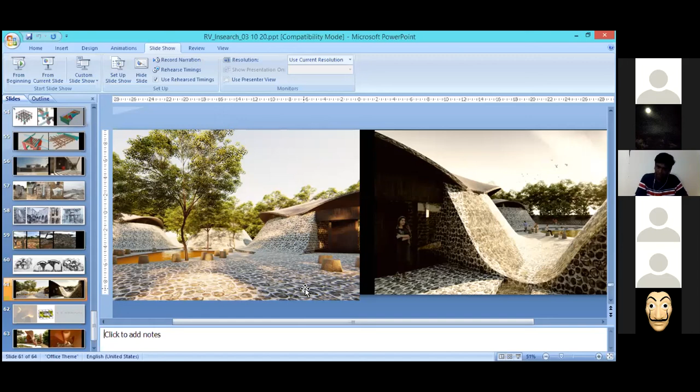Hello, sir. This is Pavitra. So this upcycled plastic that I'm looking at is where the plastic waste is shredded, and the techniques that I've come across are where they can be molded into different forms, and right now they're being used in low cost construction in a few countries like Brazil. So I want to know the ways this material can be used. They're molded and interlocked, so the form is made in such a way that you can interlock the bricks together vertically.

Okay. And do they also have statistics or data about what will happen when it is exposed to direct sunlight? Does it emit any kind of gases when exposed to solar radiation and natural elements? Based on the research and the product they've come up with, the product doesn't emit any harmful or toxic substances. Okay. And it is resistant to water? I think plastic as a material is highly resistant to water.

So if you look at traditional tile roofing, the way you detail the junctions, you will have to develop your molds in such a way, so you need to understand a bit of construction and how water behaves if you want to seal water. My concern is you might have to do a lot more research, even though the literature available says it does not emit. We need to understand how it does not emit, so that it lets you explore the material further, and it can be shaped to different molds.

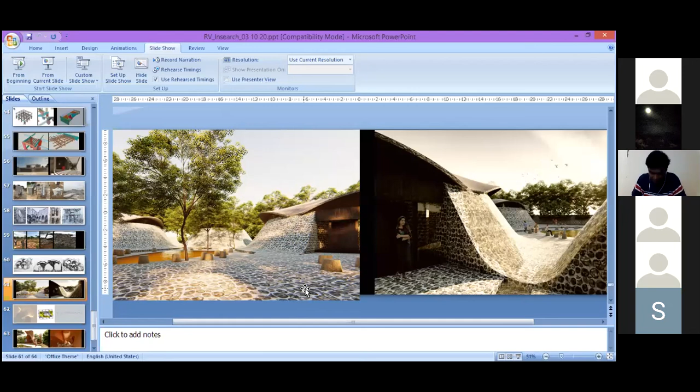Hi. Yes. Okay. So this is regarding the stone construction. I had a small doubt. This system where you've used only joinery details, does it work just with one story, or can you go ahead with many stories? Because it's also very common in Bangalore, and I have seen in many temples where they've used trabeated construction, but it's sort of limited to just one story.

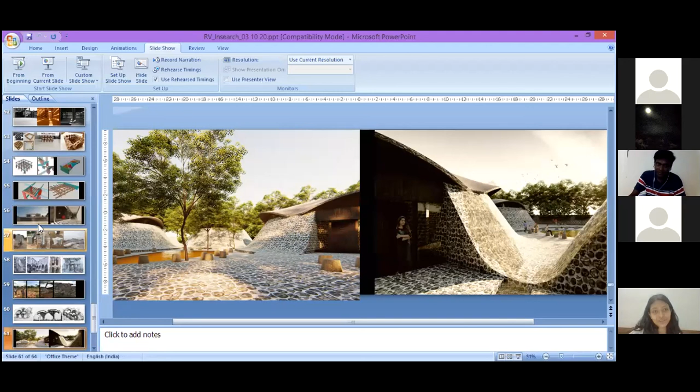So not really. See, if I just go back to the slide, this is our area of interest. So you just want to use stone as smaller panels, as I was quickly running through these slides. These are some of the processes which have come through, but when you sit with a structural engineer, he would always look at it from the way the forces are addressed and all that. So we are just trying to see how this story can actually expand further, and we could come out with solutions which are unconventional. So this is already the first step, I would say.

And you can also look at works of the Japanese architect Kengo Kuma. He's mainly used wood, and he has come up with multiple stories, but I don't know if that will work for stone. He has also very recently done an installation in stone. It's not a structure out of stone, but an installation where they're using the techniques they actually use with wood. But he also says that wood and stone don't behave in the same way, so they would have used a different kind of screw details. It is interlocked, and then you still have a screw which goes through and through.

So you can probably look at the installation. I think Deepak sir should be able to show you the video. I think he's the one who shared that video with me. So I think there is a lot of potential. We are in the early days in terms of trying to understand stone. It takes 2 or 3 years for you to really touch the material, feel it, understand.

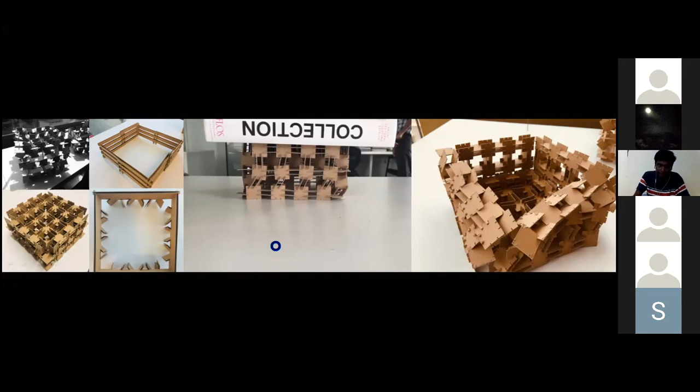Thank you. And what about the joinery? You were talking about the joinery you were trying. Can you explain a little more about that? See, these are traditional joineries. If you see, these are for stone columns. So you might have limitations; this is like a dovetail. If you understand wooden joinery, it's a similar process in stone, where you can put the stone, interlock them, and then put a load on top. They become very stable. They don't move in axis, nor do they slip out of the context.

So this is one, and what we are trying to do specifically in our project is, I think these slides. Can you see this junction? Yes, I can see what I'm highlighting. So it's with the support of the structural engineer that we are able to resolve it. It's not just as an architect. I came up with the concept, and then he told me the best way to interlock it, the best possibility of interlocking stones together.

We were trying out different combinations, but he says when you interlock it in a certain way like this, there will be more tensile forces at a certain point and more compressive forces at a certain point. So he came up with a solution and gave us this layout. So you will have to sit with the engineer, who will be able to advise you on what kind of interlocking you need for different conditions of your junctions.